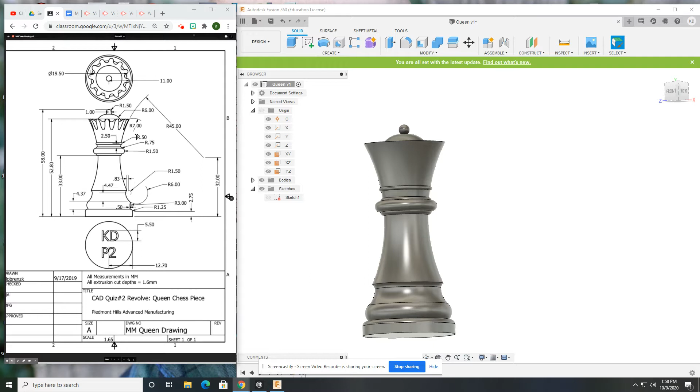This is the fourth video in the quiz number 2 Revolve Queen chess piece. We've made the solid body of the queen. Now we want to focus on this crown to do the extruded cut to give it those scallops. I'm going to need to create a plane to sketch on because I can't sketch on any of these curved surfaces. It just doesn't work that way.

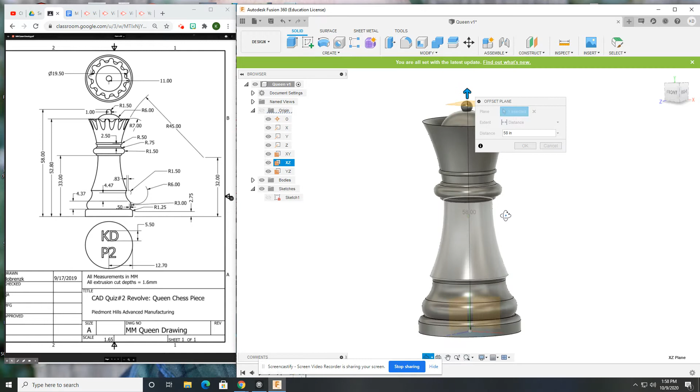So the easiest thing to do is to take a plane. Now what I'm going to do is essentially use this plane as my model, and I want to put it 58 millimeters to the top, which, as we know, is the very, very tippy top point of the queen. So now I have a flat plane I can sketch on up here. So sketch right on that thing. It moves you to the top view.

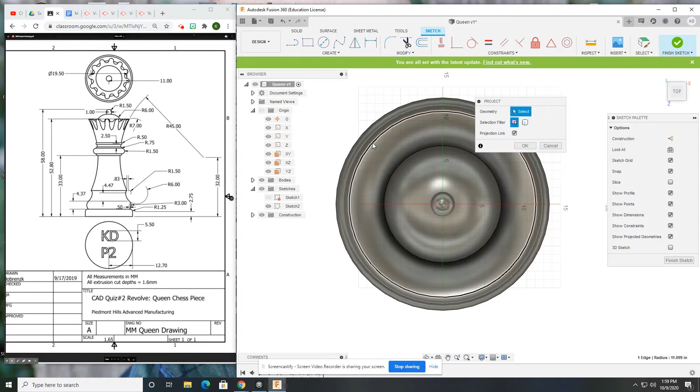And now I'm going to want to import some of these circles. Make sure you're importing the crown because there are some base circles that you see beyond. Make sure you get this crown edge in there. It's very, very important. Okay, I'll go back to the top. And now I want to create these scallops.

If you look over here, I'm kind of creating a bunch of tangent arcs. There are some construction circles I can use here as well. I can go 19.5. And make sure that that is concentric with the existing circle. And that is going to be the center point of those arcs. So those arcs will evenly split on both sides.

Now there's a lot of ways to go from here to get this product. I'm going to show you one way that I think is a little easier, but we'll see. Everyone has a different experience here. I'm going to use nothing but 3-point arcs. Actually, scratch that. I'm going to start here. I'm just going to create a guide. I'm going to try to do 1/4 of the arc instead of the whole thing and then pattern it. I feel like that will be easier.

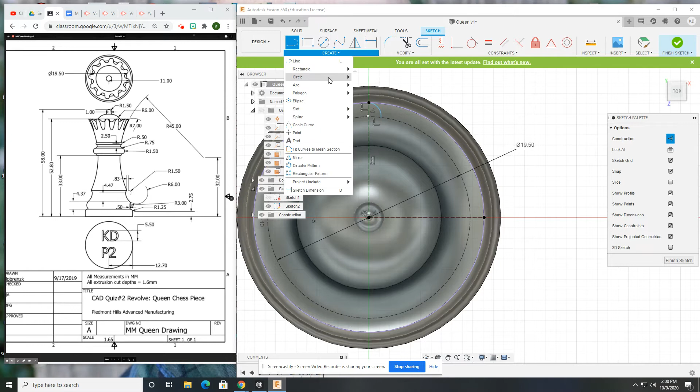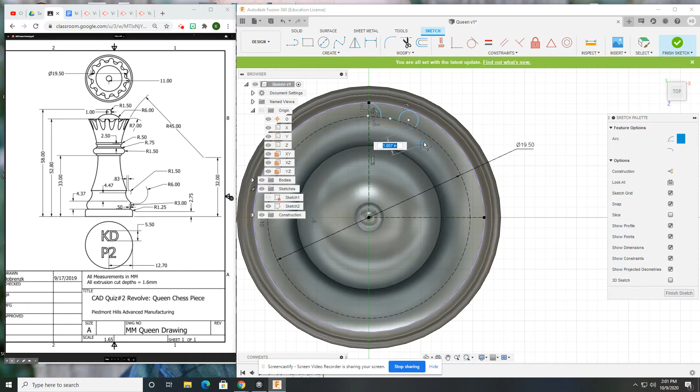So here I need half an arc. Oh, and that's still construction, but I can toggle it back. And then I'm going to create, so let's see, if I cut that in half, it's going to be 1, 2, 3 full arcs. So there's 1, 2,

and then I would do another half of arc here at the end. Oh, these are a little small, but I can kind of drag it and fix that. I'm going to use my equal sign so it knows all these should be equal to each other. And these are going to be half of those. So I don't necessarily want to do that. I do want tangents on everything as well. Some of them already have them, but not all of them.

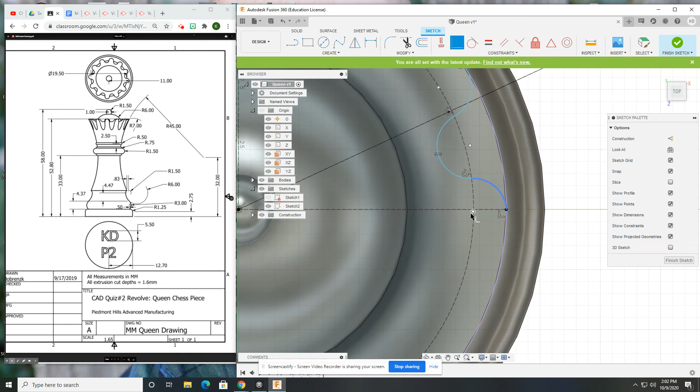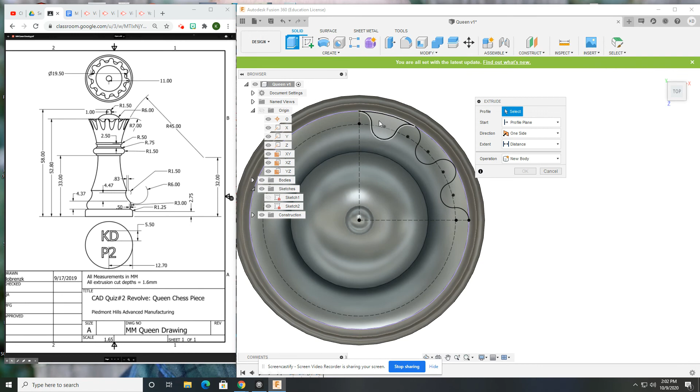And I know if I wanted half an arc here, the center point is going to be on this line. The same thing here, this center point is going to be on this vertical line. Okay. Now, just with tangents and some equals, that worked. So now I should be enclosed here. So let's go ahead and try and extrude cut this. Yes, this is going to work.

Extrude cut. I just want to make sure I go completely through the surface. So for distance, I'm going to drag it down this way and stop somewhere around there. All right. So I've got 1/4 of it here. Now I could have done the whole thing. That would have been totally permissible, but I'm going to try and do a pattern and see if that works. And that will be on the next video.